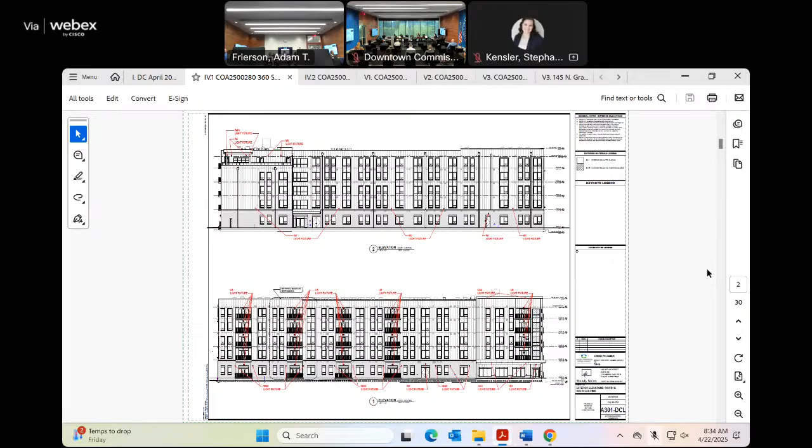You can see the elevations here where they have called out the light fixtures, and typical renderings of those fixtures on one of these sections. Here's the site plan showing where lighting is located outside, and here are floor plans showing the lighting. Then here are the spec sheets for the fixtures, labeled with corresponding pictures that you saw on the elevations.

We've identified which specific fixtures they are picking. This is the fixture that's on the balconies, you can see it here. I'm sorry, could you speak up just a little? I'm having a hard time, maybe just into the mic a bit more. Sure, so this fixture you can see here in the spec sheet is mounted downward, but the applicant has it mounted outward on the balcony. So they are somewhat shielded by the recess, but just wanted to point that out.

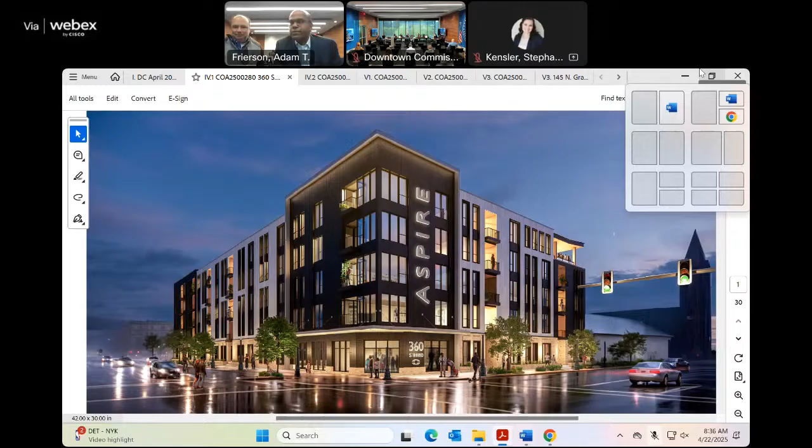I don't know if you guys want to review first, or if you want to just see if there are any questions. I could start off with a question: I wondered if the lighting for the parking lot is included in the submittal. I didn't see a plan for that, maybe I missed it. And if so, could you explain what fixtures?

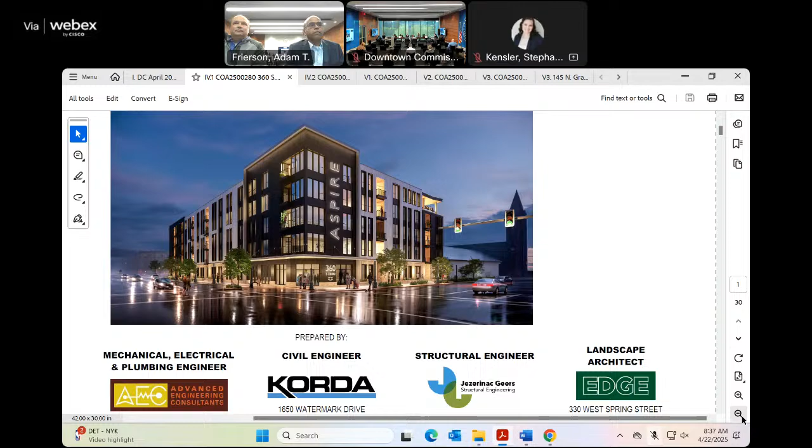So I believe when we submitted the original package for the building COA, that had the site lighting included, and parking. So yeah, we do have pole lighting and fixtures. Those are downward facing.

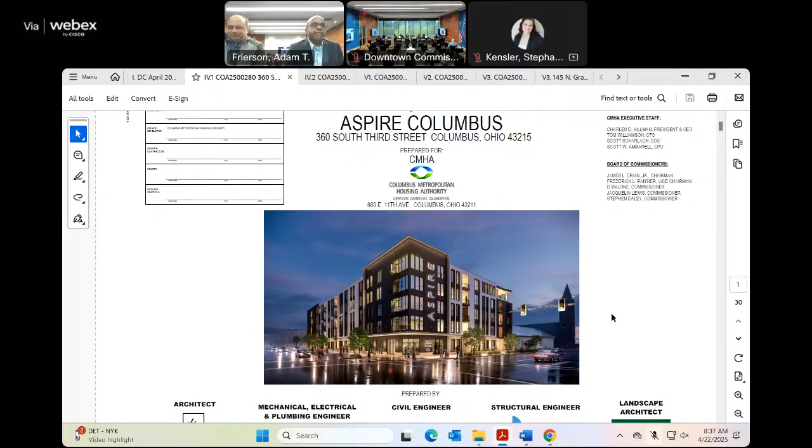Okay, that's fine. Could you show us which fixture that is on that last page there, just so we can put it all together.

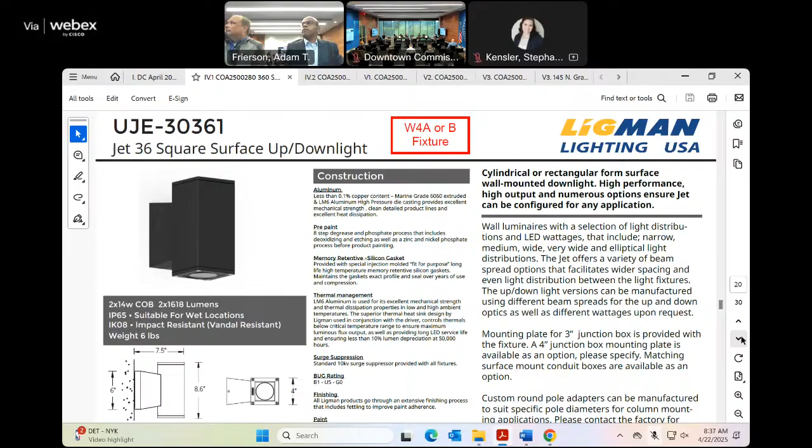And then I do think we had a little bit of conversation about that southwest corner, where there was kind of a green spot, an art area or terrace there. We talked a little bit about that. It's been a couple of months, so I think maybe that's an unfair question. There's no green space per se on the ground level. It's mostly parking, and we have a generator back there.

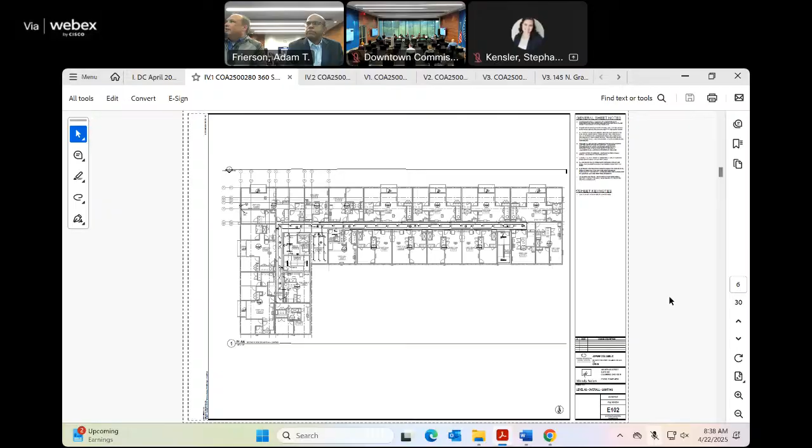Can you see that site plan again for just a quick second, Stephanie? The fifth floor does have a rooftop patio area, but it's not really a green area either.

If you see along that very southwest corner there, the parking lot kind of runs onto the street. Yes, correct. You have a tree and a planter there, I guess. So they have the generator just south of the building, and it's just kind of a green corner. So the only lighting for that really is those poles in the parking lot. Yes, that's correct.

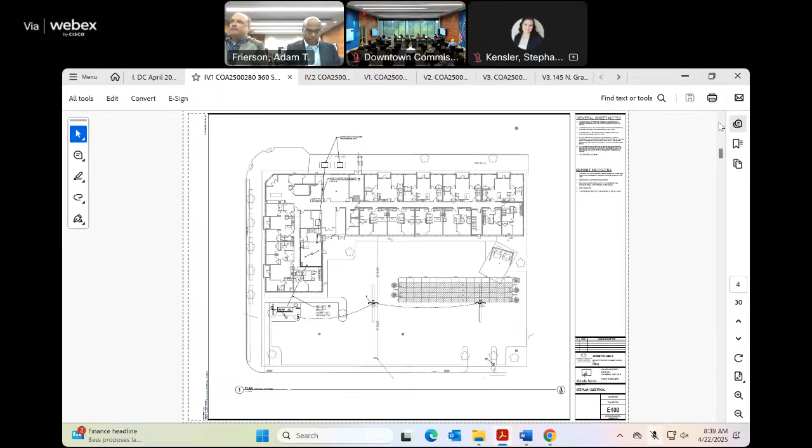Can we figure out what fixture it is? It's going to be similar to one of those on the last page. The upper left corner there is the lighting we're looking to use around the building in the back. So what we would then do is take that same design and drop it down to match the wall mount. Yes, with the pole, that was our intent.

Okay, other questions? Jana, does that answer your thoughts? Oh, I'm sorry, you had it in the packet and I missed it. No problem. Anybody else on anything?

What's the pleasure of the group? There's a motion to approve. We'll get a second. Is there a second for this motion? Okay, so it's on the table.

Go ahead, I just had a few things. The W6, I think it's called the Graze Elite Powercore lighting that you're using on the fifth floor east elevation—can you explain what that is for? Oh, that is over the mural area. So we have a proposed mural area on that side, and the intent was for night to have a little bit of lighting for that mural area. Basically it's a wash along that elevation. So that'll be above the mural, yes, it'll be down lighting.

Other questions, comments, thoughts, anything from the audience? All those in favor say aye. Aye. Those opposed? Motion carries.

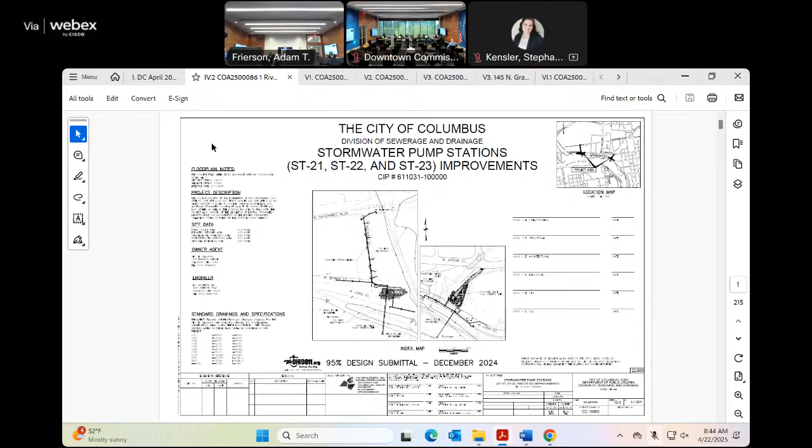This is just an overall plan of the project. You can see the two pump station areas here. There's some details on the plantings proposed.

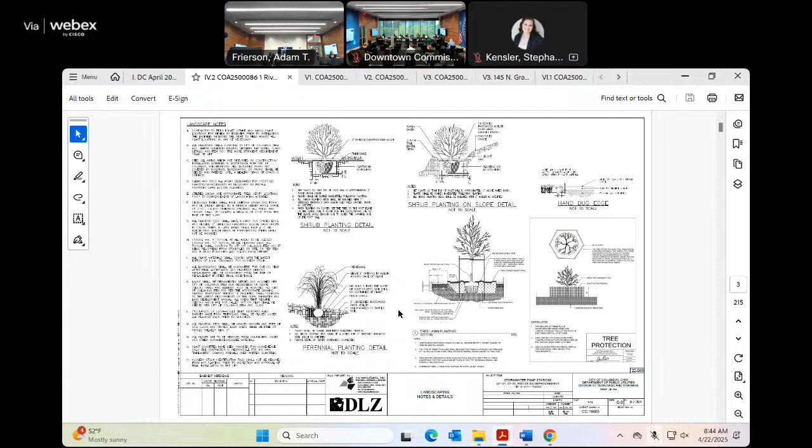This is the east pump station site plan. This is the restoration plan. Discharge and demo plan. The east landscaping plan, we'll go back to this.

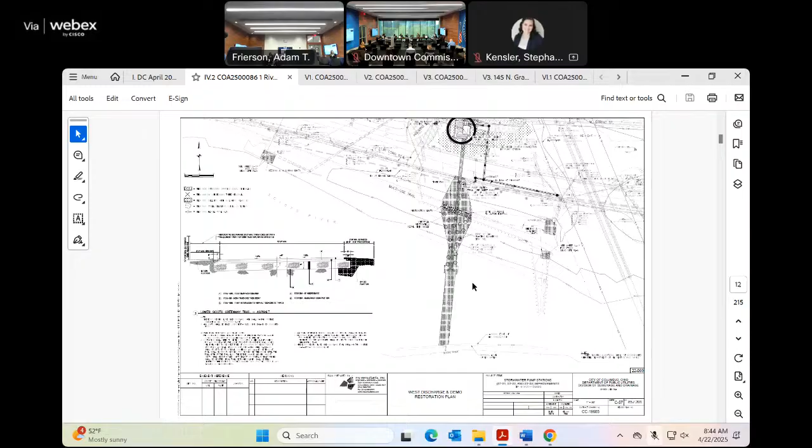This is the west pump station proposed site plan and restoration plan for Spring Street. Hawking Street restoration plan, Long Street. The west discharge and demo restoration plan. West landscaping plan, we'll come back to this as well.

These have not changed since you saw the last presentation. These are the elevations for the pump station buildings, east and west. We have our wall sections.

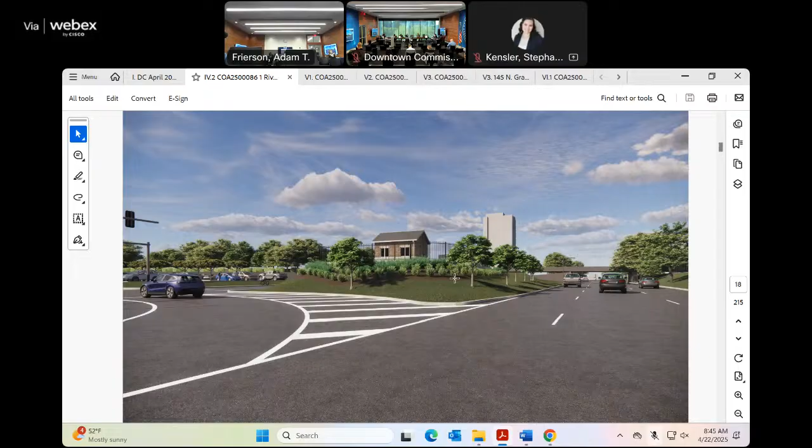Here is a zoomed in version of the east landscaping plan. Here's the rendering of that one. And this is the east one. West, that's the west one. And then here's the east.

And then these are the existing condition photos, and then these are just the specifications for the materials. We can go to any of that if you have specific questions. But with that, we can turn it over to our applicant.

Thank you. Good morning. Could you identify yourself for the record, please? Sure, Josh Brooks with MS Consultants, we're the design professional. Please raise your right hand and swear to affirm the testimony you're about to give is the truth, the whole truth, and nothing but the truth. I do. Thank you very much.

Just to be clear, there's a lot of stuff on these drawings. What we're really going to talk about today is the stuff that is above the ground. We followed this last call in February. Okay, so I missed it because I was gone.

I think the most important thing to go over would be the renderings. I think that's what you guys had questions on, the landscaping, the fencing and the retaining wall. It was really focused on at the last meeting.

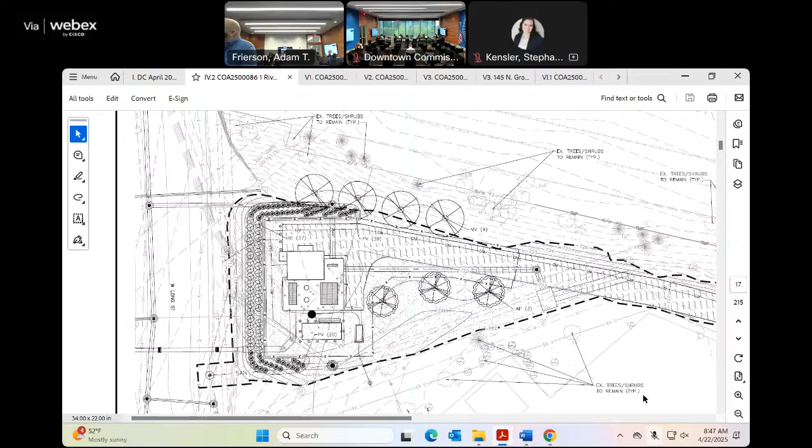I can talk about what's changed. The feedback we got last time was focused on the landscaping plan. We had a very elaborate landscaping plan, and we were asked to scale that back and focus more on natural plantings and screening. There were also questions, just looking at the drawings, it's tough to tell what it's actually going to look like. So we produced the renderings to give you a better opportunity to see what it's going to look like in the end, what our leave behind is going to be.

So we had our architectural group and our building services group put together the renderings. That's actually the materials, the plantings and everything that is on the drawings, so it's not a graphic designer's interpretation. It's actually our architects and landscapers.

How tall are these buildings? Is it tall there, or is it a little bit deceiving because of the perspective?

Well, it sits up on a hill. We had to raise it to keep our finished floor 3 feet above the base flood elevation, the 100-year flood level.

Regarding the retaining walls, is that the split face block kind of thing? Actually, one of the comments we got last time was that we just had a cast in place concrete retaining wall, and the comment was, can we dress it up a little bit? So the option we came up with was similar to a stained and stamped concrete, like a patio.

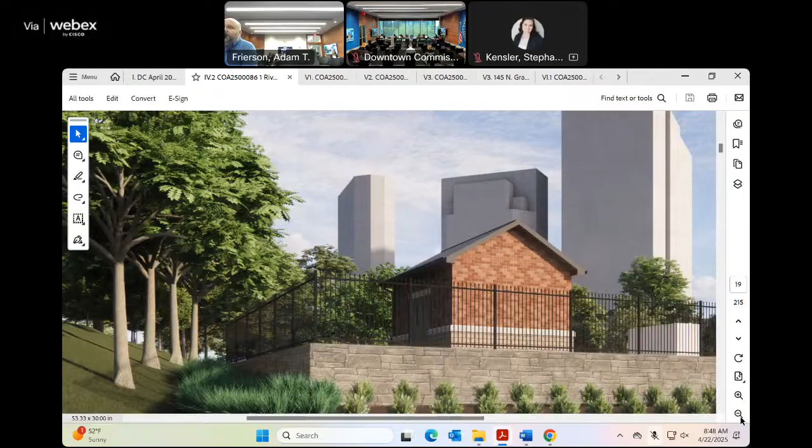When I looked at the building, my comment, and everyone else had a chance to put forward a thought, was I don't know if we need that foundation area or water table look. My theory is they really kind of want to go away, we don't need to make a statement out of them. They'd be better almost without that concrete block base, just brick, going all the way down, a dark brick that would get close to matching what we've got.

On the elevations, yeah, that's the area. The intent of that, and a lot of it isn't really going to be that viewable because it sits up high from the street, but you can kind of see it there. The intent was to match the architecture in North Bank Park, that's the way those buildings are. So that was our intent behind that.

I looked at that last night and I couldn't find it, but I guess still notwithstanding, I'd be inclined to try to get the brick, a dark brick, to match each other, and maybe get as close as possible, or even use the same brick they put on that North Bank building. Again, that would be my opinion.

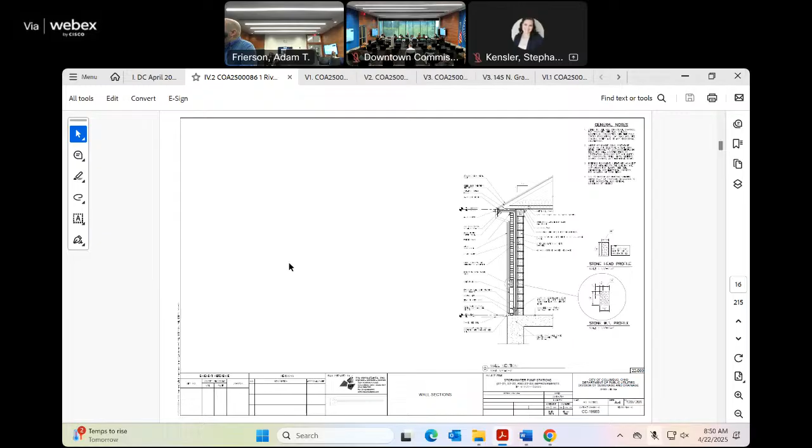Thoughts, comments? I agree, I think keeping that building simple is better. I appreciate the work on the landscape, and I appreciate you guys simplifying the plant list a little bit, I think that's always a good idea. I worry that this is a little formal.

It sort of looks like we've landscaped the house. What I mean by that is this landscape will need to be maintained, as opposed to if it were naturalized or loosened up a little bit.

I'm not going to no-vote it, but left to my own devices, I would make it look more natural. I would focus on big trees, less small shrubs, and try to make it look less like a landscaped front or backyard. I just worry that this will need maintenance over time, that's the simplest way I can say it.

It's what we said last time. It may have been something like that, but everyone interprets these things a little differently. We had flowering plants and things that would draw attention to the site, and I took your comment as let's keep it looking more natural with shrubbery and trees rather than flowering. Another approach would be the Ohio State University style, grass and trees. But again, these are challenging projects.

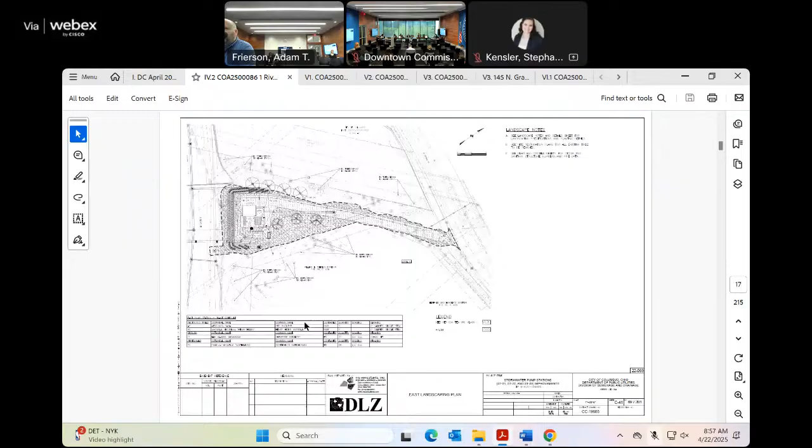Okay, what's the pleasure of the group? Anybody want to make a motion? Okay, there's a motion to approve, meaning approving it as submitted, is that correct? Okay, second, there's a second for that.

Any other questions, comments? Any comments from the audience? Anybody? Okay, we have a motion on the floor. Does anybody want to push any of these issues we've discussed, with the water tank possibility?

Again, I hear one person say it's fine, and I don't know what everybody else thinks. If I were doing it, I'd probably have it go away, so I'm not going to push much on it. I think Jeff also felt that way, that it's better.

Jennifer has a big smile on her face. I'm gonna do it, but stick to it. Yeah, okay, so I guess that issue doesn't have a lot of push behind it.

So we do have a motion on the floor. Any other questions or comments, anything from the applicant? No, I'm good, it's just a beautiful work of art.

Okay, all those in favor say aye. And those opposed? Okay, that motion is carried. Thank you, that was approved as submitted. Thank you very much.

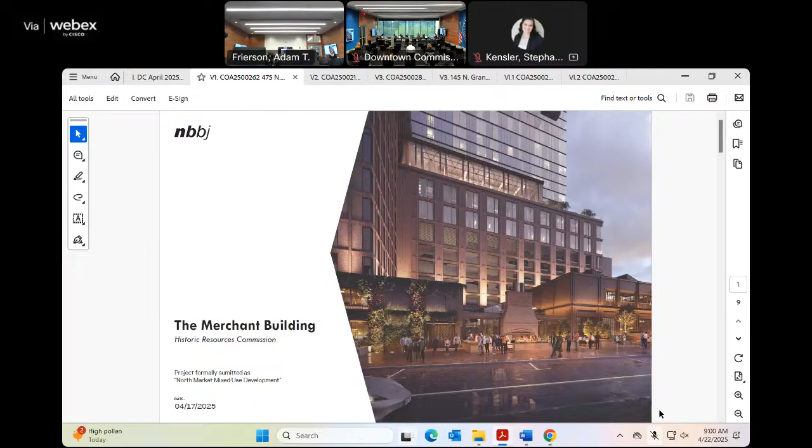The proposal is consistent with the downtown design guidelines, and I did want to note that this is also subject to HRC review, and they did move this to staff, so they have already acted on it. And then here are the materials from our applicant.

This is the site plan, this is the area we're talking about from the north side. This is the previous design, and then you can see here some modifications to the fireplace, and that retractable roof slightly behind, and where this was more open brick, you can see where that has been enclosed in storefront material.

There's a larger version of that. Here is the material palette. And then we get into the technical design for this enclosed space.

And the only thing we're being asked to look at today is this section right around the fireplace? Yes, and then this, basically they're enclosing this space where it used to be open, and this roof is... Now, okay, so that's right now, okay, and that is... okay, yeah, okay, good.

Anything else? No, this last page is just for reference of what the previous approval was. Great, is someone here for the applicant, please?

Good morning. Good morning. Could you identify yourselves for the record, please? Daniel Ayers with NBBJ, and Beverly Eichenlaub with NBBJ.

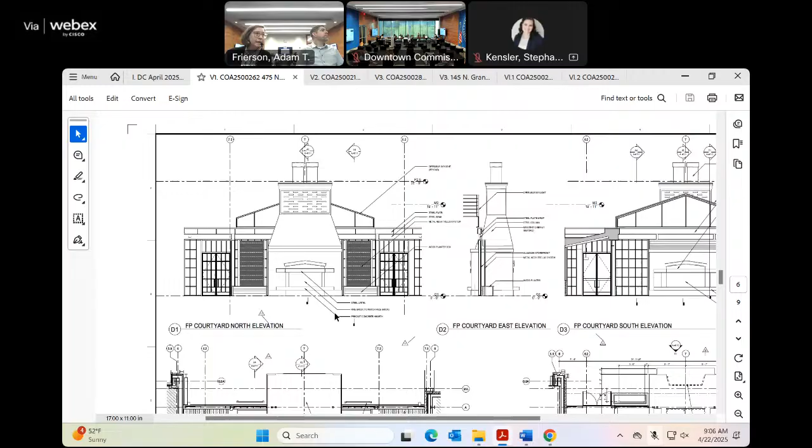There's a section there that might help with that. You mentioned a dark iron spot wood color—where is that used, is that the accent for the chimney? Yeah, that's previously approved for context, and that's actually at the adjacent restaurant—so that's just part of the larger context.

Any questions or comments from the audience? What's the pleasure of the group here? The question we had was about the planters in the front—did you have those originally? That's not changed; that was something we originally had and looked at and approved. Yes, that's correct.

Questions, comments, what does anybody think? Okay, we have a motion to approve. Can I have a second? Second. Thank you, the motion is on the table. Any questions or comments from anyone?

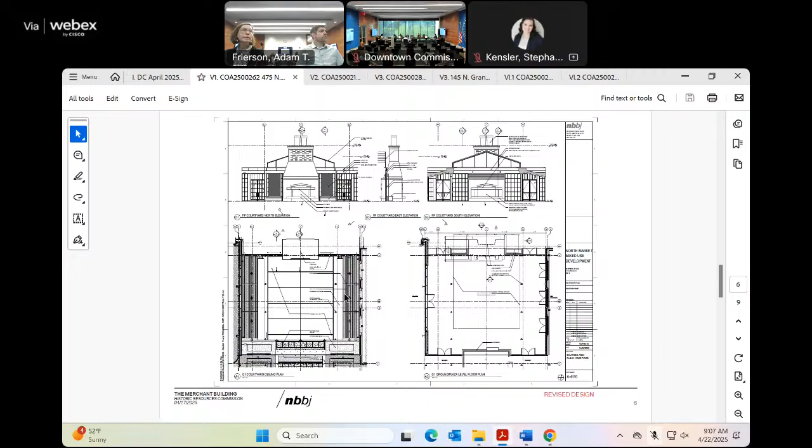Just one quick question—you mentioned redoing the brick pattern on the fireplace; it doesn't affect my opinion, I think it's fine, but what were you going to do there? It's really more about the form of the fireplace being slightly different—it's a little bit taller, the angles are a little different, relating better to the retractable roof. Right, that makes sense. Any questions from the audience?

Okay, all those in favor, say aye. Aye. Those opposed? Abstaining—one abstention, and that is approved.

Thanks so much. Thank you.

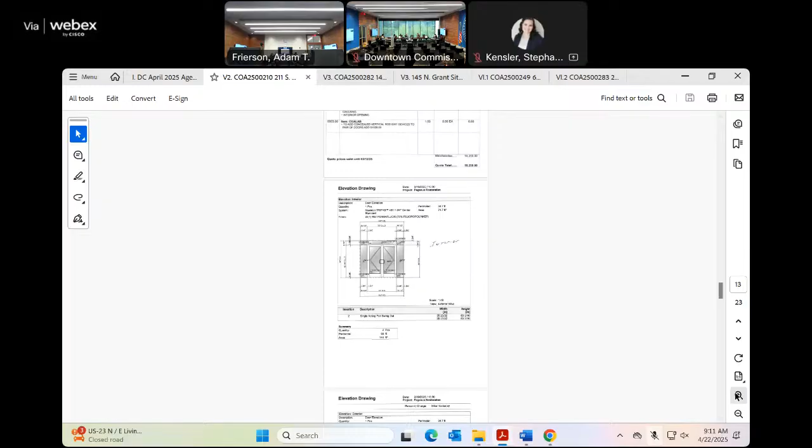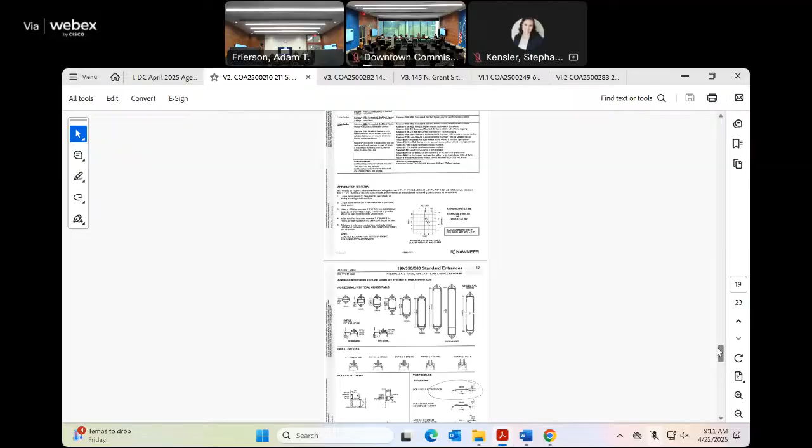Let's see the new shading on this. That would probably be a better question for our applicants. Inspiration. With that, we'll put it on to them.

Okay, could the applicants please come up?

Good morning, could you identify yourself for the record, please? Sure, my name is Alex Medvec. I'm one of the owners of Forward Health, who owns 211 South Fifth Street or 200 East Ridge Street. Could you speak into this mic so we can hear you? Sure, it's Alex Medvec of Forward Health. I'm one of the owners, and the address is 211 South Fifth Street or 200 East Fifth Street, or East Ridge Street, sorry, there's two addresses for some reason. Would you raise your right hand? You swear or affirm the testimony you give is the truth, the whole truth, and nothing but the truth? I do. Thank you.

Okay, go ahead, you want to explain what you're looking for? Stephanie did a great job, but basically we just want to update the building. The building, not only the exterior, but the interior hasn't been touched, I think, from maybe the early 80s. So we want to breathe some life into the building and use it as our corporate office.

We currently are located in Groveport. To that effect, we wanted to paint the exterior brick white and update with black windows, which is kind of the trend you see. I think the Aspire building that you showed earlier had all black windows, and numerous buildings within not even a block of our location, I had pictures, all have all black windows as well.

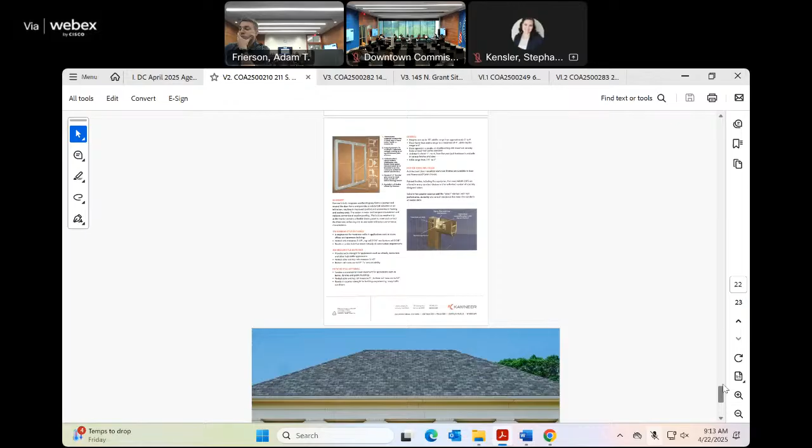Well, I don't know if we have the details on here that, at least, I would like to see. The building you've got shows, or the existing building has, for example, panels underneath the first floor windows. Those would remain white. So they stay, in other words? Correct, everything that Stephanie described, the only changes would be the windows would go from white to black. And the shutters? The shutters would be, like she mentioned, black as well.

It's in the scope of work. So you're going to keep the existing shutters? We'd replace them, or replace them with like for like, but just black to match. I believe right now they're just wooden, or maybe they might be vinyl, I don't know. Did you attempt to get the appropriate size so that the shutters are half the width of the window? Correct, we don't plan to change the design, only the color scheme.

I'm not sure they are, but I'm just asking whether you're planning on replacing or leaving what's there. If we can salvage them, I mean this is something we weren't too worried about. If we can salvage them and they're in good condition, we can paint them black, we would do so. If they are damaged beyond repair, then we would replace them.

How about the columns and the pediment? Does that get painted, is it painted black or is it painted white? Again, what Stephanie said is we are only doing the windows and the shutters and the front door. Everything else, the brick is white, and everything that's currently white will be cleaned and repainted white.

So the scope of work is not that detailed. It's very much just the windows, the shutters, and the front door. I have a little bit of a misgiving about not having an elevation this time.

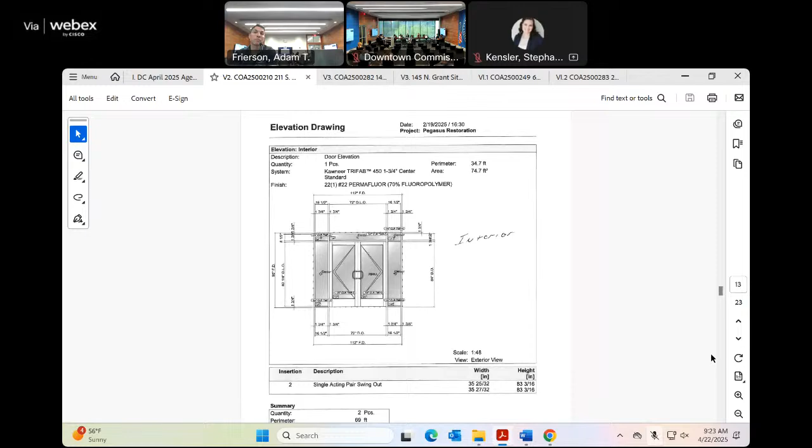What do we want to do - do you want to have him come back, or do you want to approve it subject to something? Let's say this one along here. Does anybody have a problem with the storefront doors? He's got a very straightforward plan on the glass storefront doors there.

If someone wants clarification on the blue - when I'm presenting the materials, I thought there was a question about why this is shown as blue. I think when we're presenting this to you, do we want to know why that shows? I think that's just to show those are glass sections. I don't know that it's even possible to have blue glass like that, but I mean...

Just so you know how I feel personally - I feel like I can't make a decision unless I see elevation studies. I can't determine it. I'm willing to give this a shot.

I guess I kind of did too - I think if you have the divided lights on the windows, it's fine. And then what do you want to do with shutters? Now it's going to paint the whole thing white, so we're going to have shutters that go down below the windows on the first floor, and we're going to have the panels. I think the panels should be black.

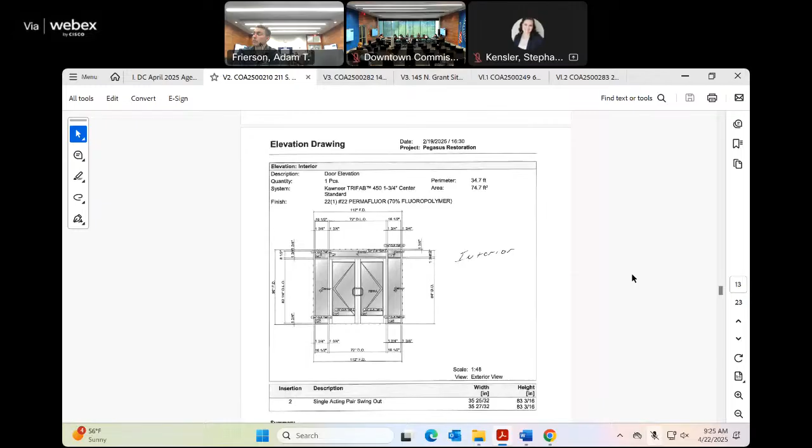The shutters are going all the way down. Can you see that?

Those panels are proposed to stay white. So if you want them to be black, we're not married to the idea of those being white. From the pictures, it doesn't look like they need repainted. It was gonna be white, which is more for the path of least resistance, but we're fine painting them black.

Since now you're going with this 6/6 divided light, what will the profile be? Will it match what was previously on the margin? Yeah, it would be, they sell it like a snap-in piece, basically. Yeah, you're gonna see less.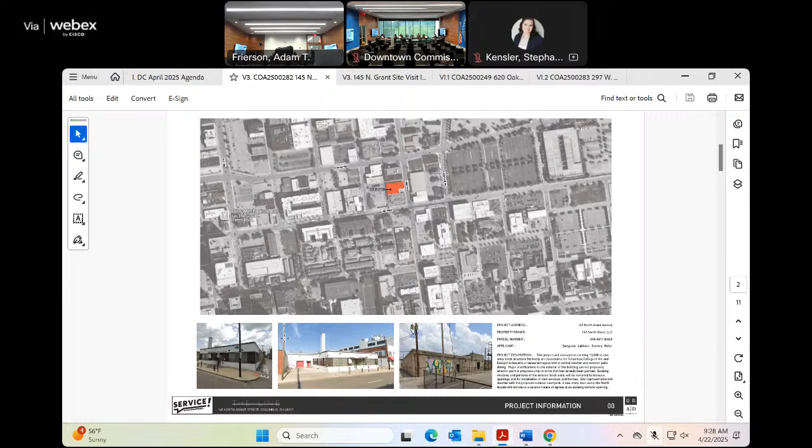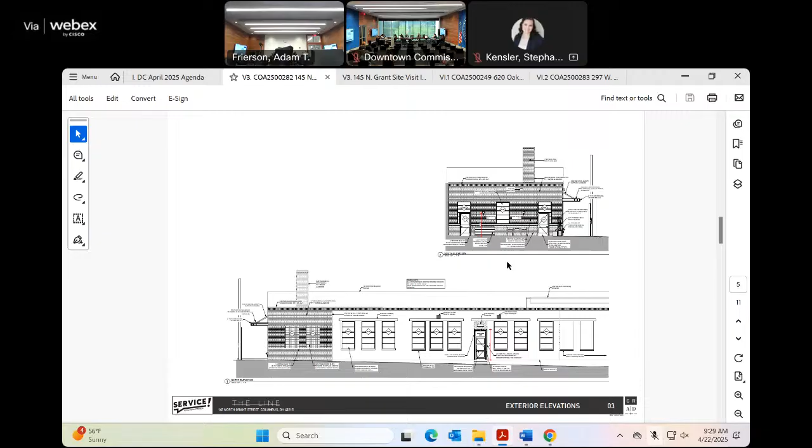Here are the materials submitted by our applicant. This is the building we're talking about. Let's see some condition photos here. Here is the full plan, and then here are our exterior elevations. This is the front. You can see here some of the openings and then where that new door will go, which is an existing window opening right now.

Here are renderings from the front. There's a patio space, and here's the material. Adam went out and took some existing condition site photos. Here's the north elevation—some of these existing openings that are infilled will be opened up, so we will lose chunks of this mural, but the trade-off is additional access and transparency to the building. Here are some photos of the existing glass block at the current entrance, and this is the space that will become patio space. And that was it.

Very good. Would the applicants please come up? Good morning. Could you identify yourselves for the record, please? Yes, Christina Panofsky with Grad Architects. Sorry, can you make sure you're speaking up? Yes, Christina Panofsky with Grad Architects. Great, thank you. Sangeeta Lakhani, Executive Director of Service, which is a relief effort for hospitality workers. Okay, could you raise your right hands and swear and affirm that the testimony you're about to give is the truth, the whole truth, and nothing but the truth?

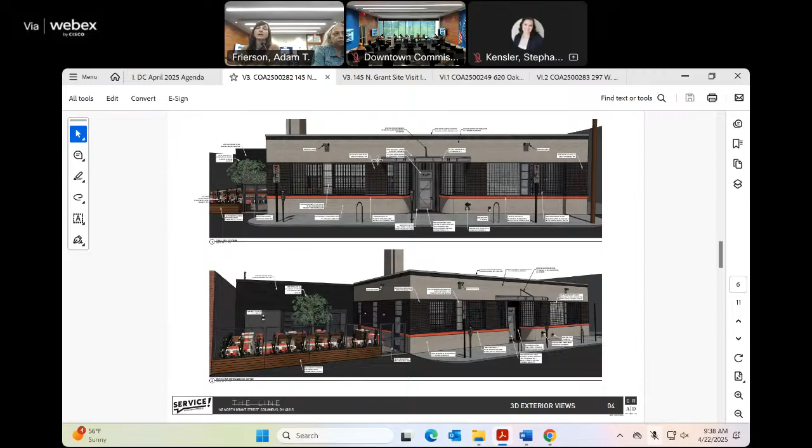Questions, comments? I guess when I look at it, in a way, I hate to paint limestone edges there. I haven't looked at that, but it makes such a nice accent. It does make a nice accent. But I would note that for whatever reason, the color is not right. It's more of a terracotta than that bright.

Would you consider a color of white? Yes, yes, we would.

Okay, where are we, guys? Yeah, I think I like it too. Great, I've always liked that. And I like it that you're, I don't know, it's not maybe a historic reuse, but it's kind of at least sure you're using the old building. You're leaving a lot of the character in the pieces there, and I like it that you're painting what has been painted, not painting what has not been painted. So that's good.

Yeah, I think it's great, it's a great concept, particularly for workforce development. I know that that's happening in Franklin County right now in Cafe Overlook. That's us, and I believe that we're part of that. Yes, so just knowing that you're still within that area, particularly the closeness to Columbus State, and the opportunity for individuals who are studying to be able to work with you, I think is great for the community. Thank you. Thank you.

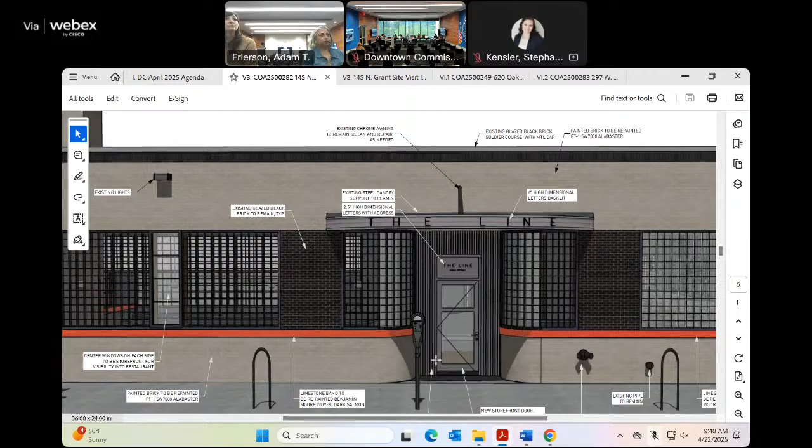Okay, and so let's get into just details here, because you're asking for approval today, is that correct? Yes, please, correct. So lighting on this, let's go to some of the details. Does that represent what the signage is that you would want where it says the line? And then is that the lighting that you're looking for? Is there lighting in the patio area there? We do have some lighting.

So currently the, I'm sorry, I can't hear. Oh, I'm sorry, I'll speak louder. We do have lighting in this, there are currently existing lights on the exterior. Oh, move to another slide.

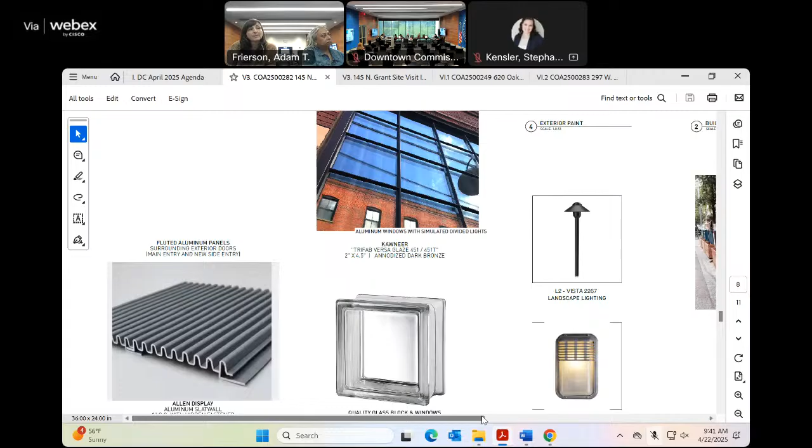So we have proposed exterior lights that will be in the patio area as shown on that rendering right there, or the spec sheet. And we also have some landscape lighting that would go in the planters and around that tree, and then all remaining light would be existing. There are some wall packs that are already on the building that we're keeping.

Okay, and then that, where it says the line, would be your signage, right? Correct, that would be backlit. Have we left any details out that we need to discuss further?

Landscaping wise, does the tree get planted? Other than that, you're just using planters, right? So I don't know that we need to approve planters.

Okay guys, what's the pleasure? I heard a comment about the color of the paint, apparently no objection. I think we have everything else we need.

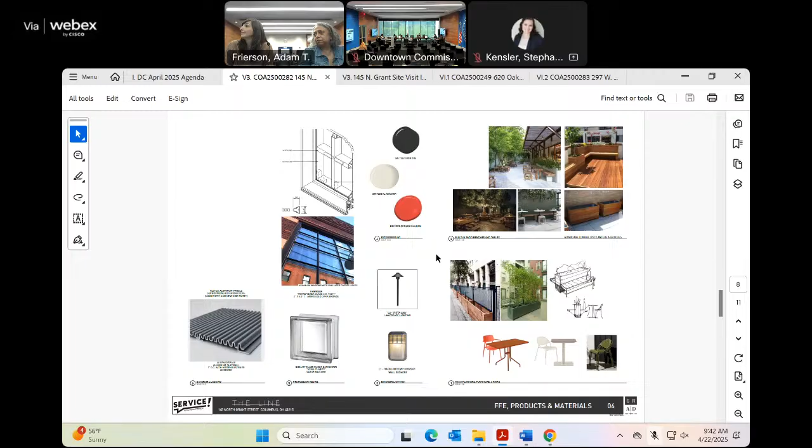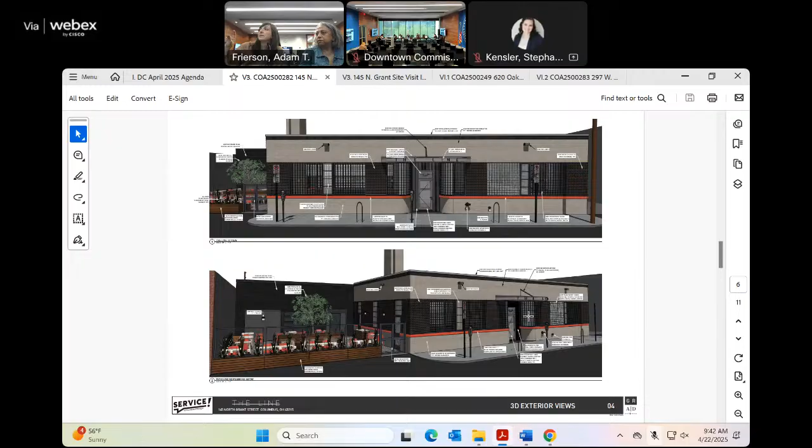To clarify, we would typically need additional detail for signage. This is probably signage that can be staff approved, but we want to be clear in the motion whether you are or are not approving signage. We don't have a motion yet, but that's a direction we could go. To be clear, there are two forms of signage: signage on the awning, and signage above the door considered to be applied to the transom window—it might be vinyl, or tiered. Will the building address be on there?

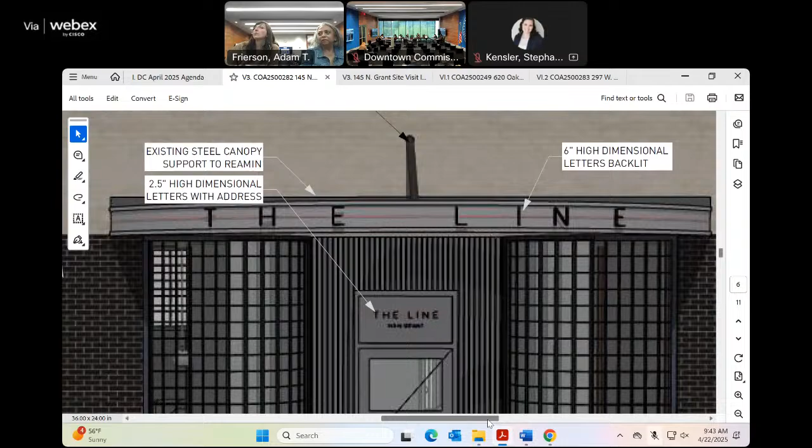Is that a new door there? That is a new door, yes. And what material would that be? It's a storefront system, but it's a chrome color to match the existing.

Is there lighting under the canopy? There's currently existing downlights, so we intend on using new exterior downlights, just replacing them.

Okay, what's the pleasure of the group? If we mentioned the paint color, there was some comment that the color being proposed and the rendering is a better tone. So is it left where the color will be kept as originally presented, or will the color be modified? I think that's to be determined with the motion. What do we want to do? It indicated the buildings—so what do you think would be a better color? A color similar to what's in the rendering, though how we legislate that exactly is a question.

Do you want to look at that and come back with another color? Would that be another presentation, or a staff approval? Would you mind doing that—just come back so we can look at it. It would be a very quick session here. And I would ask Stephanie if she might be kind enough to put you towards the front of the agenda if we did that. But would that work for you?

Yeah, correct. Okay, so can we have a motion then? I think I know what direction I'm going—somebody want to make a motion? I move approval of the zoning as submitted on the condition that they come back with a different paint color. Other than that, I think we're saying everything else.

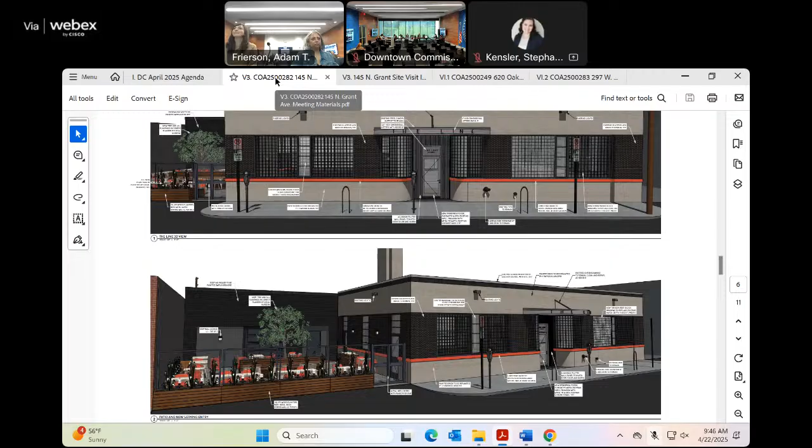Thank you very much, thank you. Get here whenever, you'll come back and we'll talk about figures. Thanks so much, thank you. Okay, very cool, love that building. It's a cool part of town too.

Alrighty, now we are switching gears to two conceptual applications. Our first one is COA 25-00249, 620 Oak Street, located along Oak Street adjacent to Interstate 71. The applicant is seeking commission feedback on a conceptual application to open five existing arches that have been infilled with CMU, and to fill them with new curtain wall windows fitting the shape of the existing archway.

The applicant will also replace the eastmost existing overhead garage door on the building's south elevation. A curtain wall along with a door is to be added to the arch on the building's southeast. Submitted materials include site plan, elevations, floor plans, existing site photos, and spreadsheet specifications.

The downtown guidelines state active reuse of existing buildings, which is generally preferred to demolition and new construction. The guidelines also state that new storefronts, whether created through new construction or renovation and expansion of existing buildings, should be as transparent as possible. The proposal is largely consistent with downtown design guidelines.

So here are the materials submitted by our applicant. This is the front of the building. And here is that archway that will be infilled with storefront and entry door. And then here is the east elevation. Here are floor plans. Here's the building location.

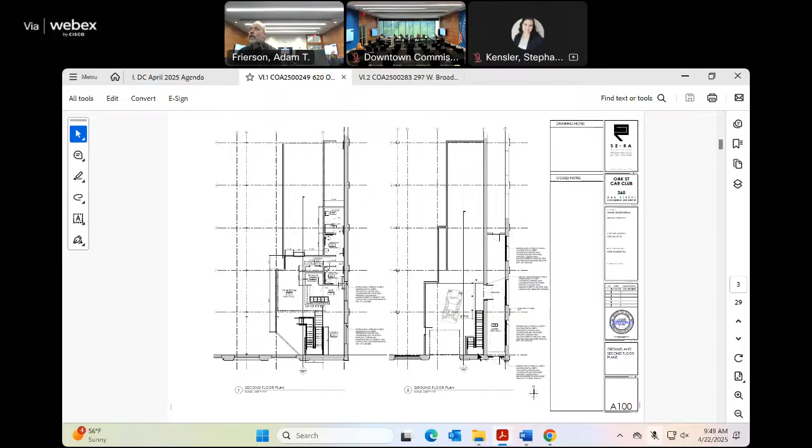We are providing a private entrance and filling that in. This business has always been a club, right? A particular type of cars club where several people will gather on the weekends, maybe 4 or 5, and have a conversation about a certain Porsche piece that just came in from somewhere and took 9 months to get to. That's kind of what they do, except they've never had a place to really go to, so they kind of do this around the mechanics as they're working.

And so the new owners of the building are coming in and they're going to provide a place where people can actually sit down and talk. And where that's being built, which is on the second level, it was once Ford's offices, when that building was once occupied by Ford. That building has had a beautiful history of many things. And that's the gist of the project.

So it's very simple, it's private, and there is no new sign, there is no new lighting being proposed, other than interior lighting. And that's where it is.

Now, in the 26-27 year, I believe the client will come back in front of you with a much larger renovation package, which will include the replacement of all the windows and really good stuff, for what is a significant building. I mean, regardless of how anybody feels about it, clearly when you look at it and go inside that second hall, if anybody's ever been there, with the existing ramp of how you get up there, it's a fantastic building. Okay, yeah, so I'm getting a little confused here about what you're going to leave the same and what you're going to change.

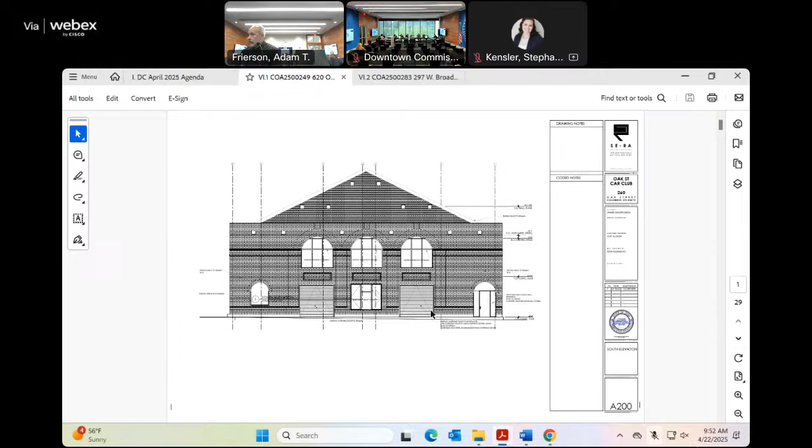Put the entrance door in the front and the front arch on the east side—correct, that's it basically. Also a garage door. Right now there's a glass garage door, not properly represented here since this is Revit, and Revit doesn't work for you, you work for Revit. That door we're going to match where the white door's at, so there'll be two identical glass doors with windows. Questions, comments, everybody get it?

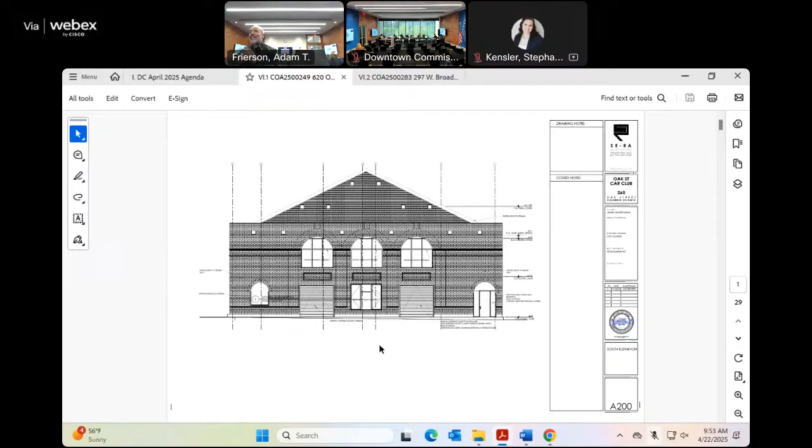Everybody understand? Recently I saw a historic picture of this building, and that gable apparently was on the ground. For the longest time, when doing drawings and sections of this thing, we couldn't figure out why the brick was different. Then we came across pictures that revealed that—there you go.

So this is a conceptual review. Oh, it is? So what does that mean? That we give you—it's not approved, it's not a final approval today. So what would my next steps be? You could already move it for action if you feel like you have everything.

Were you intending that we would? Oh yeah, I'm trying to submit the drawings to the city on Friday. So we're just waiting on this—I mean, the project is ready to go.

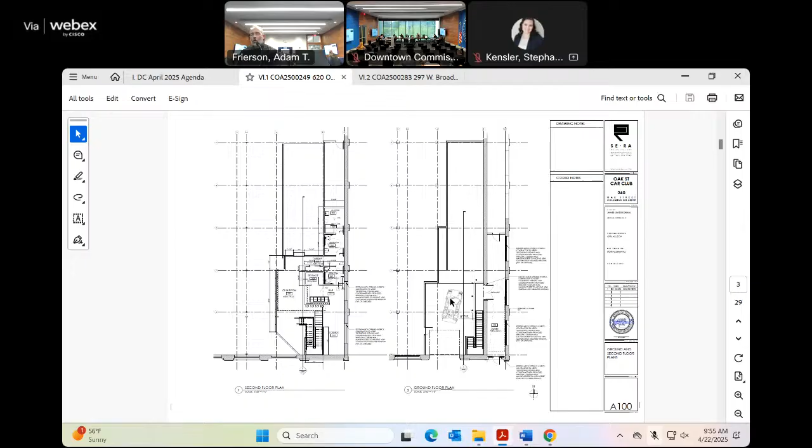I see two arches—what about the one on the right-hand side, what happens to that? That one is part of the larger plan; there's a whole series of windows down the side there. So you're not asking to move those? Correct, we're not asking to move those. What do you do, leave it up? That one just remains as is. It's blocked in—no, look at the picture, can you go back to it? There we go, the one to the right. Oh, all three on the bottom are all glassed in, and then only the two on top. I see, this fourth one is already inside. Yeah, so it's kind of misleading. I see it, my apologies.

Good, everybody understand what the request is? Any thoughts? I'd make a motion to approve. Motion to approve. Any comments, is there anything that needs to be staff-approved to finish this up, or no? I think it's fine. Okay, is there a second? Bob, a second? Second. Okay, questions?

I have one question. On the original, the window glass frame is set back a little bit from the arch, and I'm wondering how you're thinking of setting these windows now in the arches. It's the same—we'll set it back, because what we suspect is once we remove the block, we'll find the sill is there as it was before. We'll use that to set the windows in the same locations so it casts the same shadow. So we're not trying to pop them out or anything like that.

Can you clarify we're doing this as final approval? Yes, absolutely. Questions or comments from the audience? All those in favor say aye. Aye. Those opposed? Thank you very much. Thank you, well fantastic, thank you so much guys.

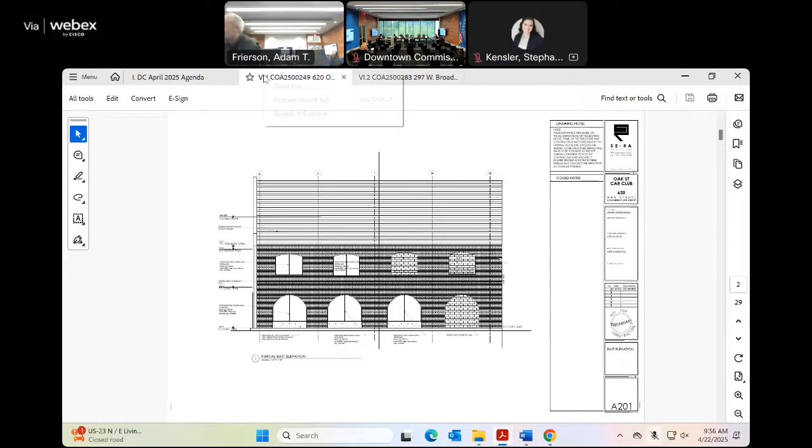All right, our last case on the agenda, also a conceptual review, COA 25-00283 for 297 West Broad Street. It is the site of the former spaghetti warehouse on the south side of West Broad Street between the railroad tracks and north of West State.

The applicant is requesting conceptual review on a new development that consists of 2 new 7-story buildings. There's a building on West Broad Street, which is 5 stories of residential, approximately 120 units. It also includes amenity and potential retail commercial space along the West Broad Street frontage. There's a winter garden amenity deck with an amenity lounge, and then 2 stories of podium parking with approximately 136 parking spaces.

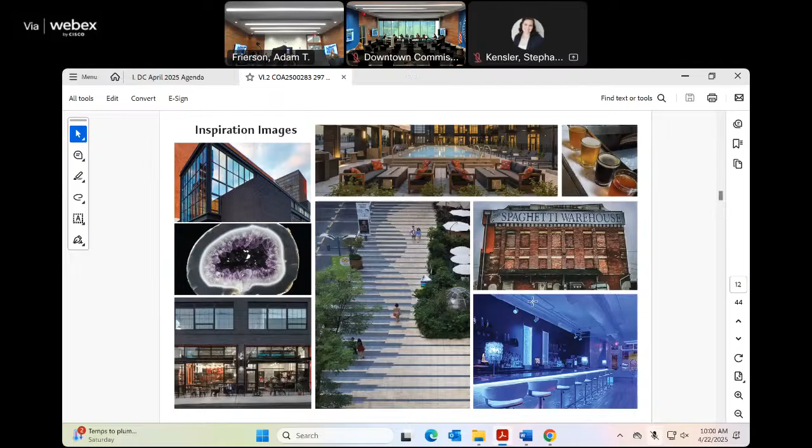Here is the project overview that we can let our applicant walk us through. Some images around the neighborhood, and inspirational images.

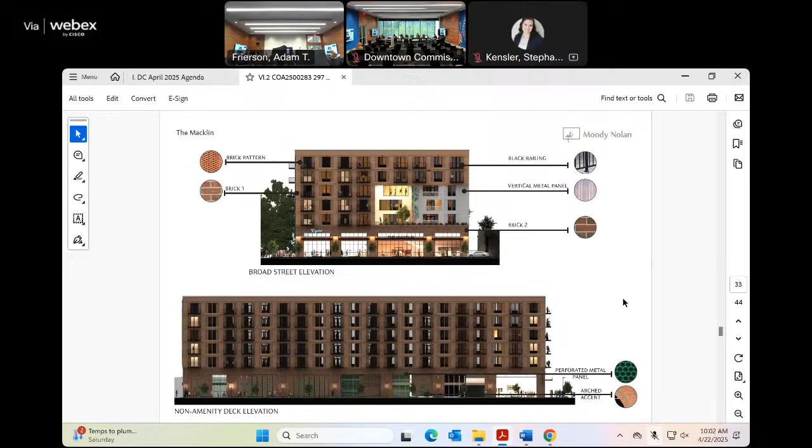And then we get into the renderings, showing some of the different materiality proposed. This is the Broad Street building, and then here's the State Street building, facing State Street. And here are the north and south elevations of those buildings.

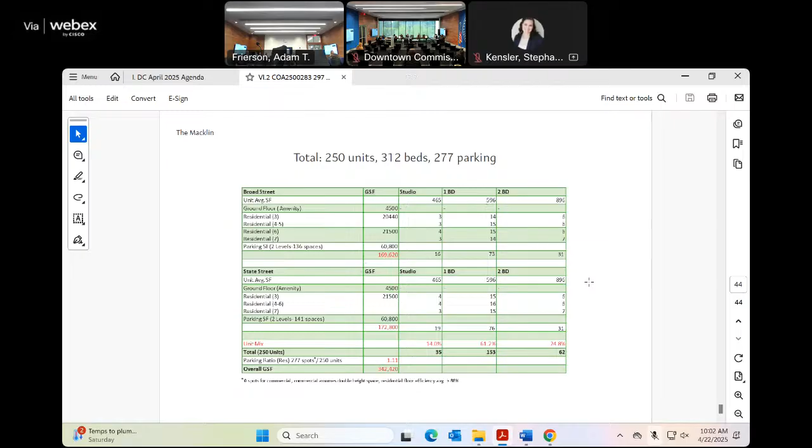And with that, we turn it over to our applicant. Could the applicants please come forward? Not necessarily all of you, but... I'm just kidding, Al, everybody that wants to.

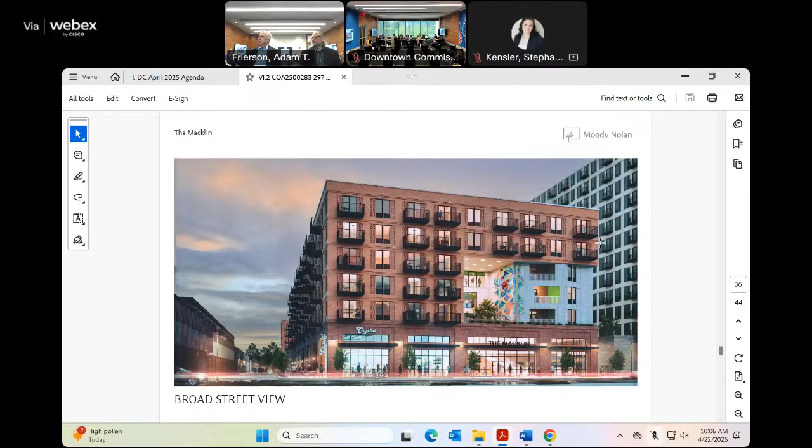Very excited about Columbus, very excited about the airport expansion of Columbus as well. As you know, I am from out of town, but this project is not some out-of-town developer not caring about the project or the history. It's a very unique situation where the ownership is actually split 3 ways between the Kelly family, Weiler family, and my family, the Pack family - 3 families coming together. So it is a locally owned project. But I do also consider myself local here because I own a business here as well.

Wanted to give you a couple of updates since we met last time. First of all, we did provide the Sanborn map as we promised. Second, we did our demo - thank you for the commission approval for the demo. It was an emotional day in terms of demoing this building, and the demo has been completed.

Also, we spent a lot of time, as we talked about in the last hearing - there was a representative from the Historical Society who came and voiced a concern, with the assumption that we didn't care about the history. But in fact we did deeply care about the history of this site, even before Spaghetti Warehouse opened in 1978. So we spent a lot of time with the Historical Society, our architect, and our branding agency, really going through the process of digging deeper into the legacy and the future of what this project might be.

And lastly, just so you know, given the market - challenging market conditions, rising construction costs, and everything else - the project you'll see here is much smaller than we first imagined. It's sort of the reality of the market conditions out there. So I think we did the best we can with a smaller scope, smaller project, to give it the best project that we could do.

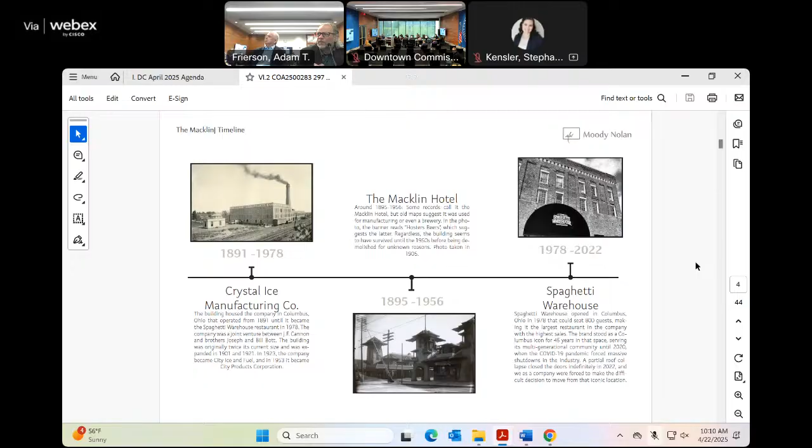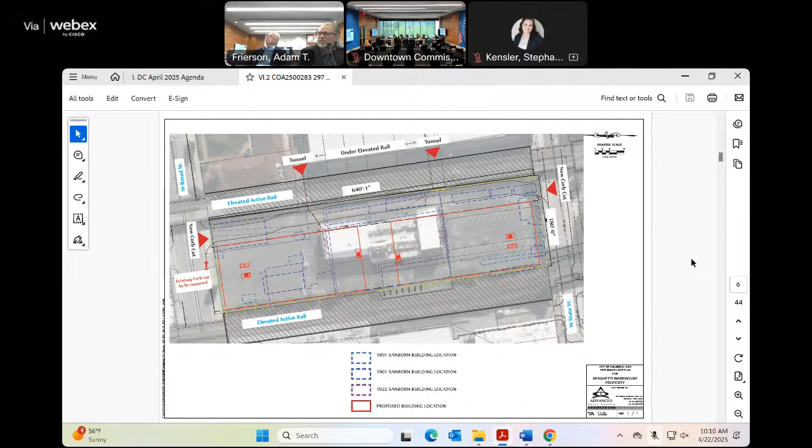Of course we talked about the Sanborn maps — you can see all the buildings that were there and how they've changed over time. Keep going. Another overlay shows the footprints of our building, again how they're moving tight to the streets, at least the public facades. You can see where the site sits.

Everybody's familiar with that — connections to all the neighborhoods around, how it sits between the two rail lines, the rich history of the team that Doug already laid out, and of course the Arts District, the combination of Arts District with industrial area and some of the history of the peninsula. Newer buildings coming online around us, and a lot of the Arts District character of the site.

We'll go back a couple slides real quick — I just want to hit on this again. There's this idea that we transform crystals into a kind of 'geode' — we have this brick outside, but you'll see we pulled the building apart to create an interior that's a little more industrial and metal-like, as a subtle nod to the idea of crystals.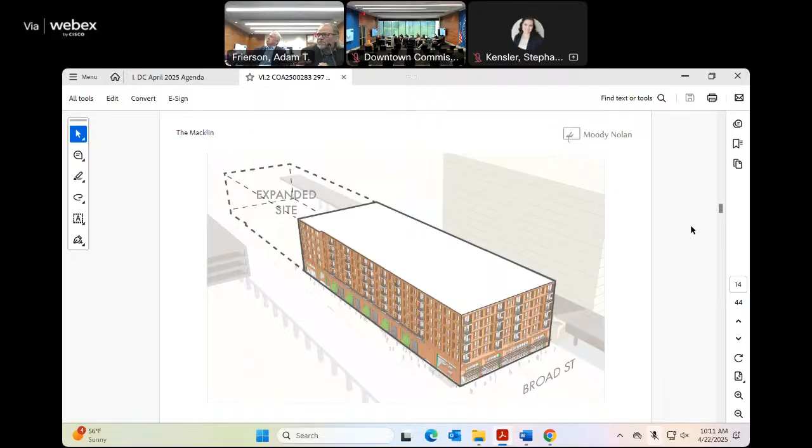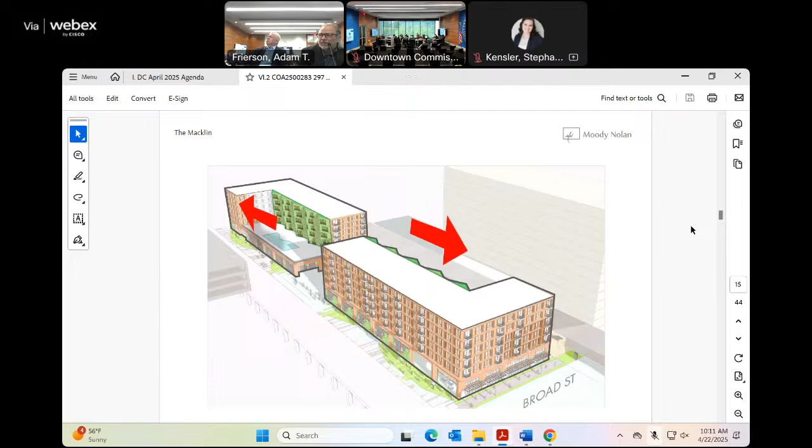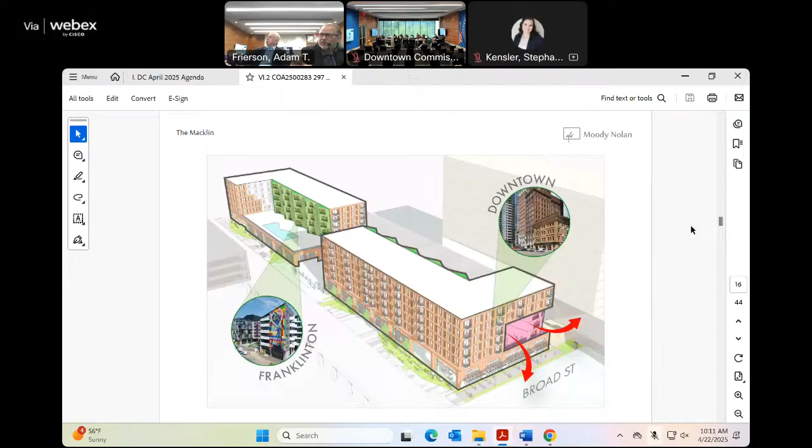Let's move on. If you filled the whole block with as big a building as you could — we move ahead — the idea was to split it to create this winter and summer garden concept, one facing west, one facing east, to pick up more sun. So the outside is wrapped with brick, and it exposes a sort of industrial inside that's metal and industrial but also has this crystalline, undulating facade. That peeks out and reveals itself on the Broad Street and State Street side at certain points — there's a portal on Broad Street to invite the eye into the development.

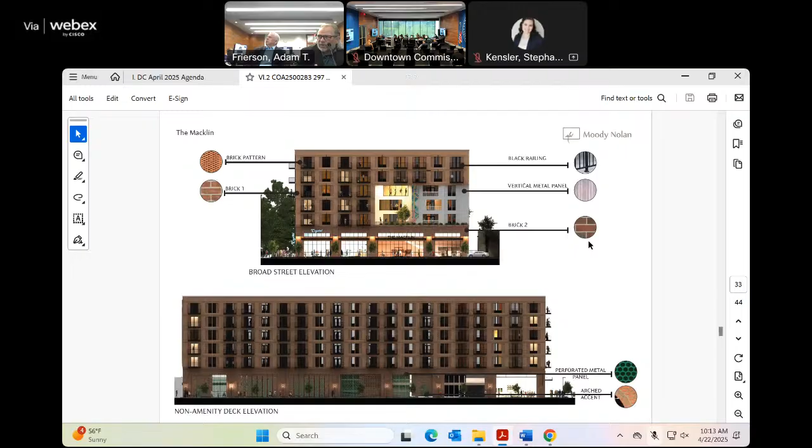And then trying to honor the red brick that was there, our design team incorporated a lot of brick detailing, corbelling, and varieties in the brick to help activate it, make it feel a little more detailed, a little more oriented, with nods to history, not exactly mimicking the exact details that were on the building.

We've also got the metal balconies that are outboard, which kind of mimic some of the ideas about fire escapes and things you'd see in more urban settings. And then storefront facing the street with very active, lively lighting that spills out into the street.

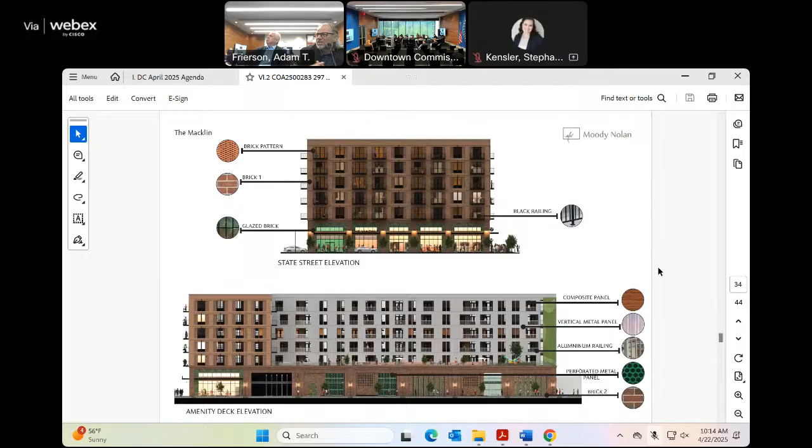Continue on. So the inside elevation, you can see the metal panels and the balconies and how they're perforated, allowing a lot of activity and views into the courtyard. That would be some metal panel, of course.

We're still working on the exact detailing, but for some of the larger blank facades that don't have fenestration, we're considering putting either art or green walls and things like that, again to activate the space and make it feel more residential, fun, and exciting.

The portal to Broad Street there, you can kind of see back to one of our amenity spaces, and a couple special units on the corner to give a little more drama to the Broad Street facade. Another view of that.

And this one, State Street, we've added some color and some surrounds to the storefront here, trying to do a glazed brick or something, again a little more kind of industrial and custom.

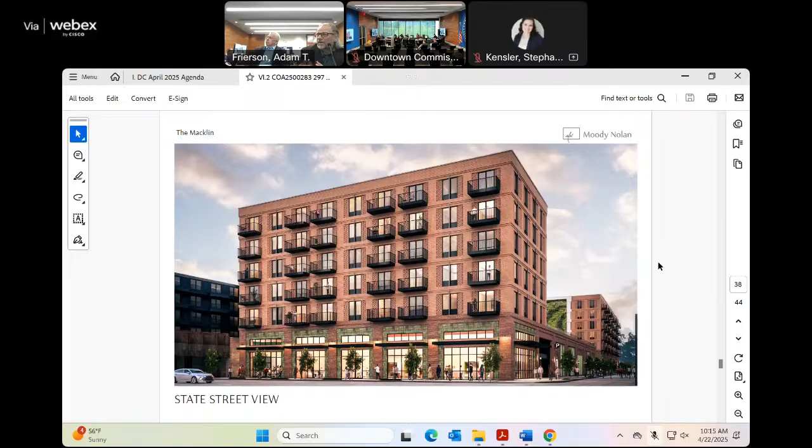And then in the plaza, we're trying to figure out whether or not we're allowed to go up against the railway wall. So that's something we're working on. We may have to pull that off a little bit depending on what kind of rights we have to that right of way. Is that wall there?

I forget, it's there, but the graphics are not there. Right, it's just a kind of brick that's sort of semi-deteriorated in some places. And is that on your property or theirs? It's their property, so it may be that we'll have to come off that a little bit.

The team has engaged a branding company that's helping to coalesce all this history into an experience where you can walk down here, and it's meant to be sort of a historical timeline of the site. It's TBD, still in the works, so we don't have it exactly worked out.

But if we have to, we'll pull that off the wall onto our property, and have not a dummy wall, but kind of a landscape wall that'll have various graphics, seating walls, and things like that.

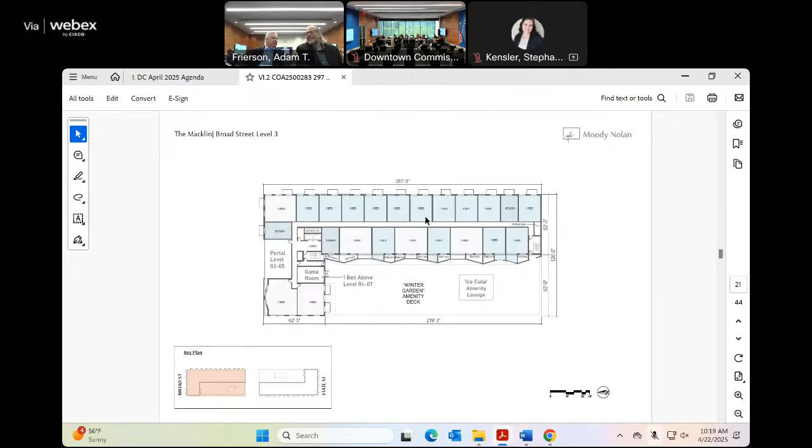We've run through the code on it, we think we're good, but the civil engineers reached out to the railroad company. They're not super communicative, but we're working with them on making sure we're far enough away. There's a chance they'll tell us we need to tighten up, but we've got some wiggle room on that fire lane. We might have to scoot it a little bit, but we're currently showing 5 feet off of it. Our structural engineer is looking into what's going on with their foundation, in case we run into that.

On that west side, where you have the elevated rail, is that area between the building and the rail just going to be left as is, that 5 foot? Yes, the idea is to fence it off on either end so it doesn't create a weird little alley that people can do various things in, so we make it a nice little area. There is one dip in the rail line on that side connecting from the fire lane, and if we can get a nice relationship with the rail line, they might let us do a little pocket park there, which could be a nice moment. Otherwise we'd fence off that sliver in between so people can't walk back there.

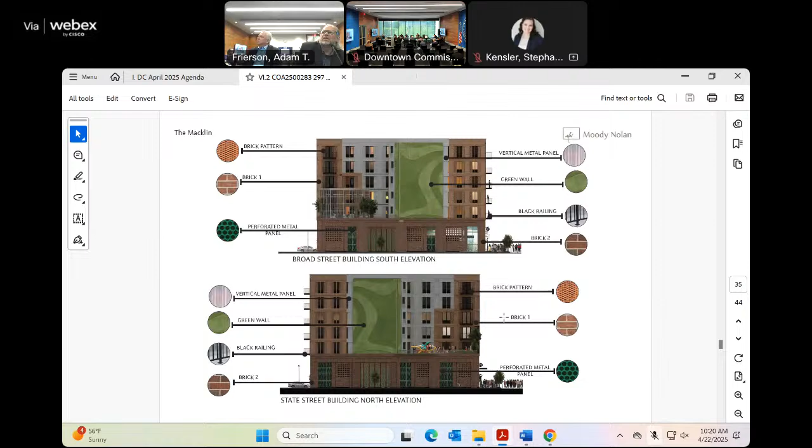I think we have one more slide, showing up to the garden. This is a nice terracing, blurring of public and private space—anybody can go on the plaza, but the top is for residents only. I think it's a nice layering of activity and people; even areas that are dedicated and you can't access still make it feel more active.

Does that sidewalk go the entire length of the buildings, even in the sections where cars can drive? Yeah, it does. We've got to detail the paving, there may be a little bit of a curve, we're not sure yet, but I think it'll be seamless. We're going to try and make it ADA friendly and make it all smooth.

Again, since it's a fire lane, we want to make sure of that. Any others? Do you want to keep going on your discussion here? Yeah, just got a couple more.

This might not be of extreme interest, but the pool deck faces east and south, trying to activate that space. We definitely know we're gonna have a pool, and we just wanted to say we're gonna have an amenity. This is for residents only, but it's kind of an ice house, a glass box that would sit on top of the wintergarden deck, which would be some kind of to-be-determined amenity, maybe a club room or a club room with a bar or something like that.

But the idea again is to honor that there's this sort of another subtle nod to the history.

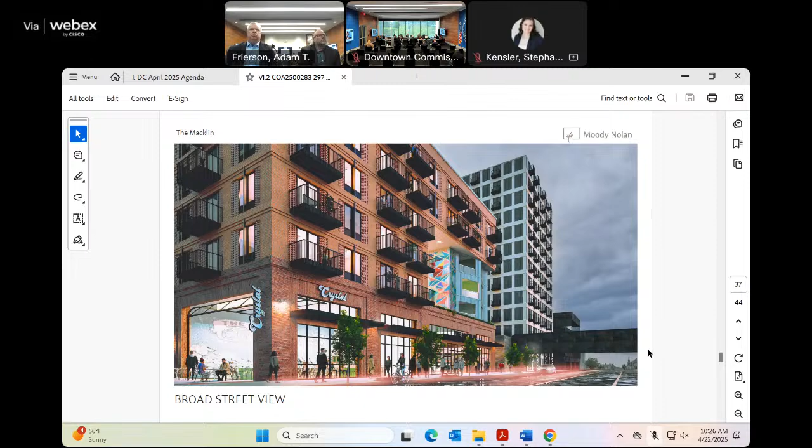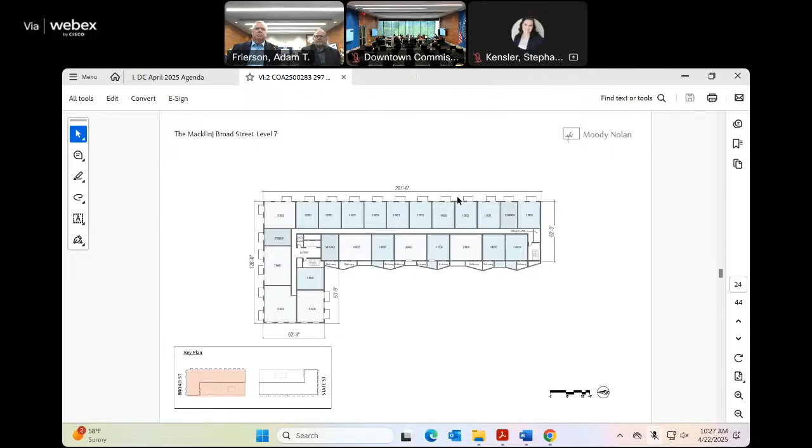I had a comment about the plaza area you're creating on the east side, where you have the interactive history wall. I think it's a wonderful concept, so much potential. On the other side, where the building is, because you have the garage, there isn't much opportunity to activate that wall or have any cafe, opening, or transparency.

I'm just talking about the whole length of the garage side too. Maybe on the walls, if there's a public art opportunity that could be wall mounted, so that when you have the one side that's very nice, maybe you have some site amenities on the other side too, just as a way to enhance that as well.

There's a lot of variety in there. I like that side on the right-hand side, and I like the lighting and the panels and all that kind of thing.

On the side we're also doing some homages to the Spaghetti Warehouse, having some of the arches, some of the infills of that. It's maybe a little more subtle, but we are trying to nod to that as well.

So an interesting side too, maybe there's an opportunity for art or something. Yeah, we definitely want that, it's a garage, so we don't want it to feel dead and cold. With the screening, there's a certain onus to keep a certain open percentage for the cars so we don't have to have mechanical ventilation, but we've been playing around with making sure that feels fun and has something to look at.

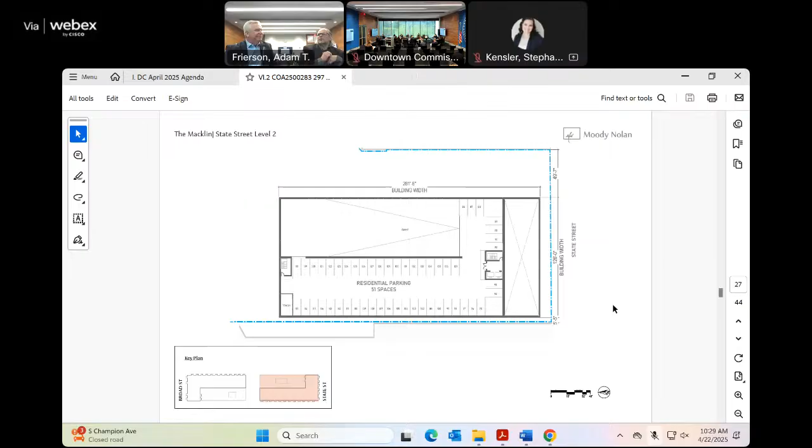It's not that big a space really. We're trying to maximize the space between the two buildings, similar idea, it just continues on in there. And if we can utilize that little pocket moment at the end, that could be kind of nice.

Good, and I noticed that it looks like you're right on the street, both on State Street and Broad Street, right? Okay, that's good, that's great.

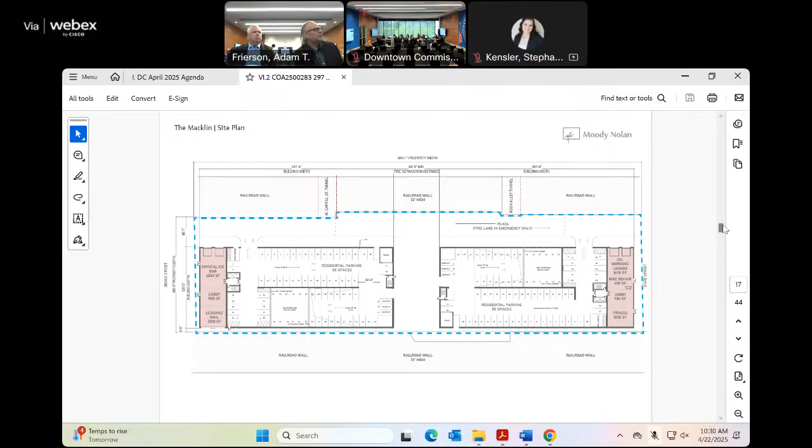I just want to say I appreciate the commitment to materiality. We demolished the building, that was important, and to replace it with something nice is great. One of the things I appreciate in the 3D renderings is the relief and depth of the brick, the detailing, and the expression of shadow and dimension. I personally love big, simple square buildings like this, but they sink or swim based on shadow lines, brickwork, depth and so on. It looks like you've really committed to that, so if this is what we see in the next few steps, I'll be super supportive.

I love the proportion and the height of the first floor. I recognize that's not going to be soft goods retail and fashion, it's going to be program and amenities. I think that's fantastic and totally appropriate. I just wanted to give support for those few components. I think it's a great project and an amazing step forward. Thank you so much.

Thank you. Okay, yeah, this is successful. Any other thoughts? I have one question.

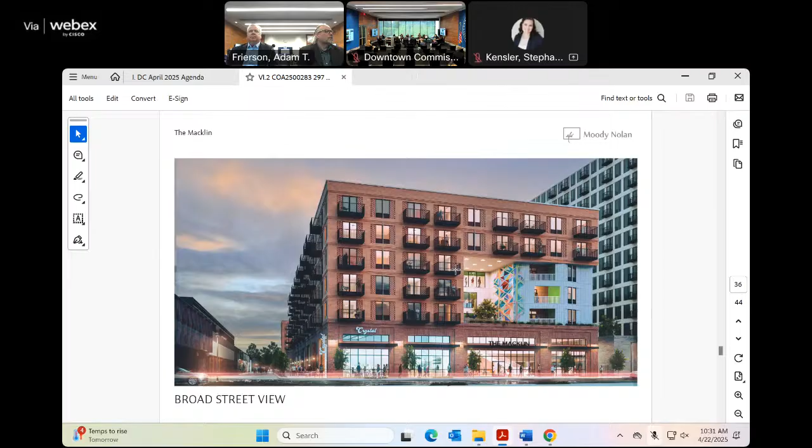On the interior sides, where you have the metal panel, it looks like when you have the balconies, it's very interesting that you're either painting that wall a color or using brick, or doing something that's contrasting in those recesses. I think that's a very nice direction because it adds variety of depth. Yep, so that was the idea. Perfect. Thank you for picking up on that.

The other thing is the pool, which I know is on the south building. Do you feel that there's enough sunlight there? It's kind of hard to tell because both have challenges with the shapes of the building, but out of the two, would that be the better way to go? One main reason is the gravity building on our west - if we put it with the other building, you'd have our building and that building creating a nice little shaded pocket, which is nice for the winter side. So yes, we figured having it on the east side where, for most of the day, especially in the morning when people like to go out to the pool.

Other comments, questions? I was gonna ask for comments from the audience, but I can see which direction the audience out there likes it, so I'm not even gonna ask for that. They're the toughest critics - I think it looks great. Any other thoughts, comments? I think you've heard what we had to say. Obviously this doesn't mean we're approving it, but you hear the direction we're all going, and I think it's positive.

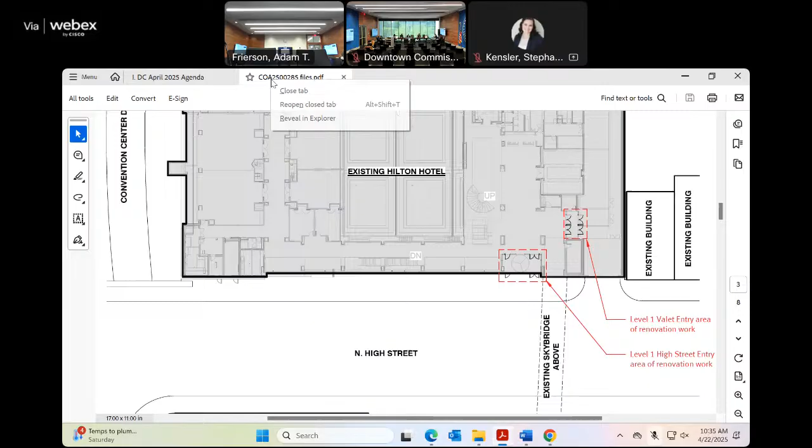Okay, thank you. Other questions? Okay, with all this, in favor of approval of the staff, say aye. Aye. Any opposed? Okay Stephanie, we've approved this for you.

Thank you, that's worked out pretty well for you, Andrew. I don't think we've had any issues. No, it's been enjoyable. I like seeing all the projects going on downtown and seeing the expertise of the groups. Okay, good. And Adam, you're hanging around, right? Yeah. Okay, I was afraid you were gonna retire.

For all these staff approvals, it's not - there's like 20 of them. He's doing the people's business. Yeah, good. Any other questions, Tom? Anybody? Thank you, everybody. Meeting's adjourned. Thank you, thank you all.